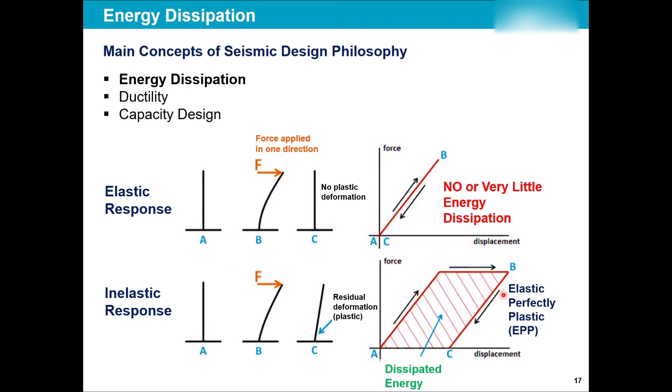Let's see the same case under an actual earthquake. So earthquake loading, acceleration versus time. My building is not getting pushed only in one direction, it's now getting pushed and pulled repeatedly. If it's an elastic behavior, it goes O to B and then back to O and then to the next point, like this. But when it's an inelastic behavior, it goes O to A and D and then G, and it makes a kind of cycle and a cycle and a cycle.

This cycle and cycle will dissipate energy. That dissipation of energy will prevent the structure from a sudden failure. Sudden failure here, sudden failure here - you see, fracture can happen, but this dancing prevents that fracture from happening. So the building will undergo permanent deformation, but it will save its residents. So I want energy dissipation, and that is given to me by inelastic response of my material. When I have elastic material like glass, suddenly there is no deformation, and a sudden collapse - that is something bad in earthquake engineering. I want something to start dancing with me, so remember this.

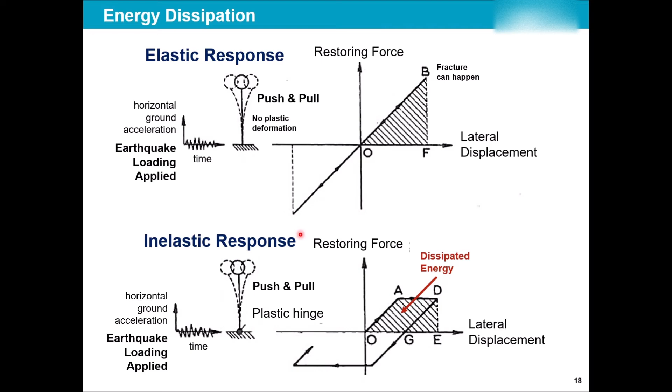Another concept after energy dissipation is ductility. Generally our materials are either very brittle or they are ductile with different degrees. A brittle material reaches a point and suddenly collapses. A high ductile reinforced concrete will reach a point of yield, and then it starts deforming and deforming and deforming. This deformation will be permanent, but it will prevent sudden collapse. Again, similar to energy dissipation, ductility will help prevent a sudden fracture, a sudden collapse, which is the worst situation in any earthquake failure.

So ductility is the ability of the structure to undergo large deformation. Strain is change of length over initial length. So the higher the strain, the larger the deformation or plastic deformation as it enters plasticity or inelasticity without failure, or the ability of a structural component to deform beyond its elastic limit. So the structure deforms before collapse without a substantial loss of strength. As you can see, the strength is still the same, while a brittle material like glass reaches that strength and then suddenly drops all the way to zero.

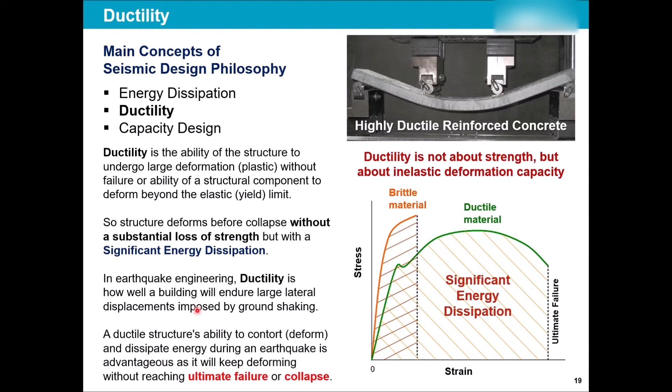In earthquake engineering, ductility is how well a building will endure large lateral displacement, meaning earthquake load imposed by the ground shaking. So ductility factor is an indicator of the ductility of the structure, and simply, in terms of deformation, it's the deformation at failure or ultimate - the last point of the curve of stress-strain or force-displacement - to the yield deformation. So imagine this is the yield deformation and this is the ultimate deformation, so the ratio of this over this.

Now consider this structure as a ductile beam or column, and consider this structure as a non-ductile beam or column. So a ductile behavior will be something similar to this - this is the same curve, force displacement. Then look at this: the ultimate point and the yield point are very close, so this ratio will be very small. But in the ductile case, this will be a bigger relationship and the ductility factor will be higher.

Now, if the curve is moment-rotation, it doesn't really matter - it's the rotation at failure to yield rotation. Or if it's based on curvature, it will be moment-curvature, so curvature at failure to yield curvature.

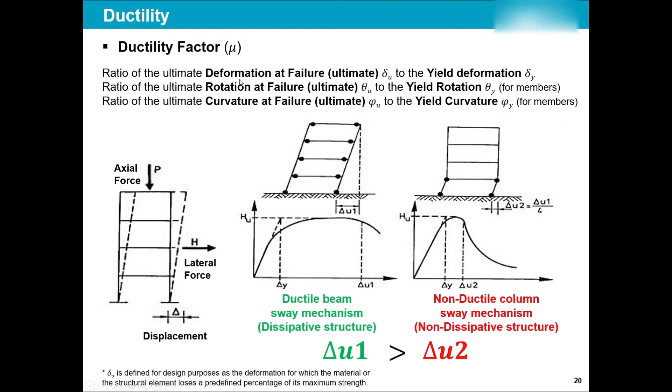That will be the ductility factor, or as we show it with mu. Now, we combine that dissipated energy and ductility behavior together, and we give ourselves a kind of discount. We say that if my building is capable of dissipating energy, and because of that has a very ductile behavior of structural components like beams and columns, I can reduce the level of my seismic action.

We will see this when we go into the seismic design based on Eurocode 8. Clearly you will see how much this discount and reduction of the level of seismic action works. But for now, remember that the behavior factor combines this dissipation of energy and ductile behavior.

There are two methods that we come up with the behavior factor, or Q. One is the equal displacement rule, which is mainly for flexible and tall structures. The other is the equal energy rule, which we usually use for low to mid period structures, or stiff and short structures. So the equal energy rule for the White House, and the equal displacement rule for Burj Khalifa, let's say.

Again, when I talk about Burj Khalifa, we know its period is 11 seconds, but you can consider it as a tall building with 4 seconds, something like that, as well as a short building, the White House, let's call it, with a period of 0.4 or 0.5 seconds. So the beginning of the response spectrum and all the way to the end of the response spectrum, flexible tall buildings and stiff, short buildings.

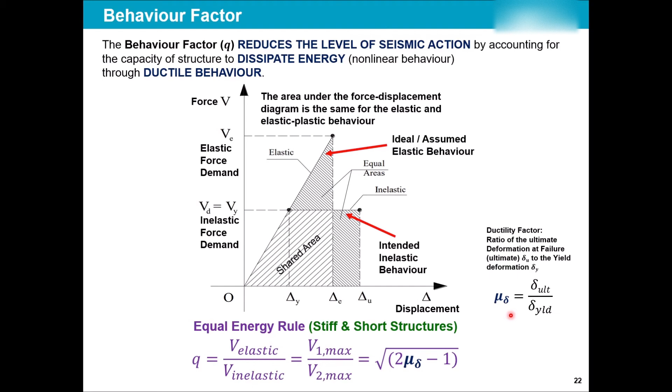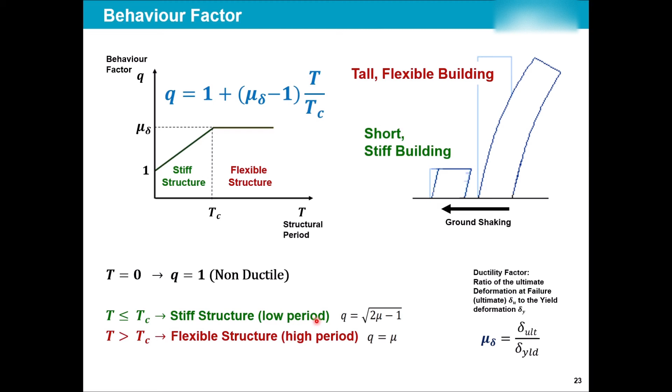Equal energy rule, as we just discussed, and the equal displacement rule, as we just discussed. And again, the ductility factor - remember how the behavior factor is related to the ductility factor. We have it for high period structures and we have it for low period structures, and it just follows this simple concept of having similar displacement or having equal energy.

Now, we discussed energy dissipation, we discussed ductility, and how these two are combined together to have a factor representing them, called the behavior factor. Now let's talk about capacity design.

Imagine a chain. If I pull it, at some point one of its links will start breaking. Do you all accept that the link where failure starts will be the weakest link? Yeah, for sure. Now, we can assume our building - all of its components, from slabs, columns, beams, joists, girders, connections between the columns themselves, between the beams and the columns, connection between the slab and the joint, footing, how the columns are connected to the footing, the foundation - all of these as different links of a chain.

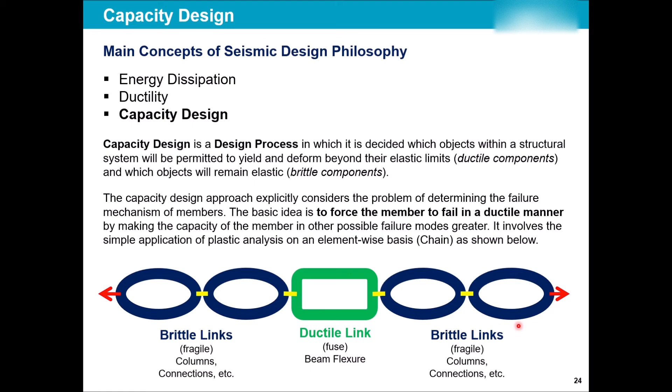Then I have moved my failure to the place I want it to happen, so it causes less damage to all the other components, and I've made sure the other components are stronger, so I can follow the normal, elastic, easy way of designing. I spend so much resource - time, money, and material - on the one weakest link I've decided on, making sure it's the best element possible. Then I make sure the other components are stronger, so they don't fail before my weakest link, and I can design them normally with any material, just making sure their capacity is higher. Now let's look at another scenario.

In a normal situation, imagine this is my weakest link. I'll make sure that this weakest link is so ductile that it takes a long time to fail. On the other side, I'm happy that all of the other links, like my columns, my connections, and everything else, are stronger than my weakest link. So whenever this guy is failing, the failure is shifted far because it's a very ductile material and it dissipates energy, so it's very low chance that it will fail.

I'll make sure that before this fails, none of the other components, which are more essential to my building's integrity, fail before this. If this concept follows, this will never ever happen.

Look at this building. You can clearly see that the beams and the slabs are strong. They stayed in their position and they look like pancakes on top of each other, while the columns were designed very weak. Now imagine the other way around.

If I have designed the columns very strong, but the beams weaker than my columns, in a way that those beams were strong enough and ductile enough to dissipate energy, I would give the residents of this building more time - the beams are starting to dance, the columns are still strong and nothing has happened to them.

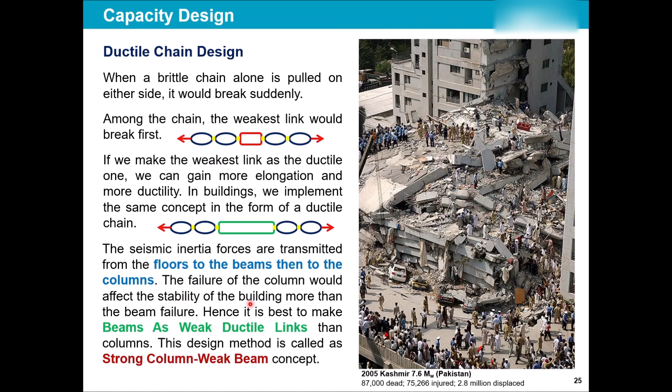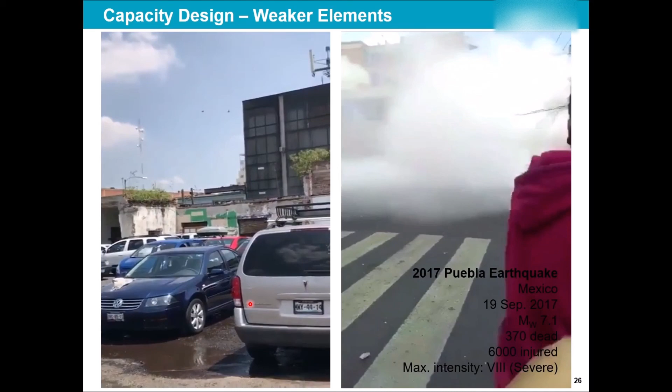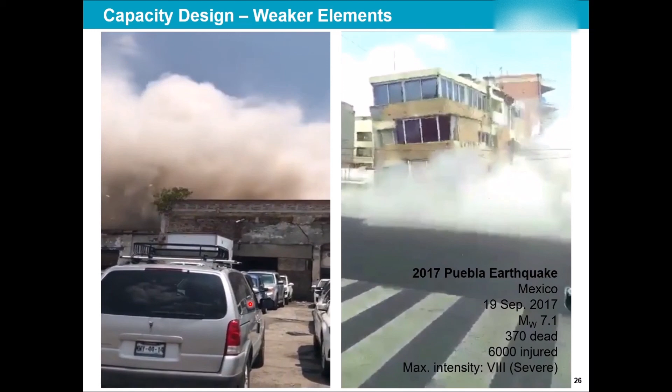Let's see some failures which not having a strong column weak beam, or having a weak column strong beam, has caused. This is the earthquake of 2017 Mexico, again a very strong earthquake, 7.1 moment magnitude. Unfortunately, 370 people lost their lives and 6,000 people were injured. If we look at the Mercalli intensity, it was about 8, so it was a severe earthquake.

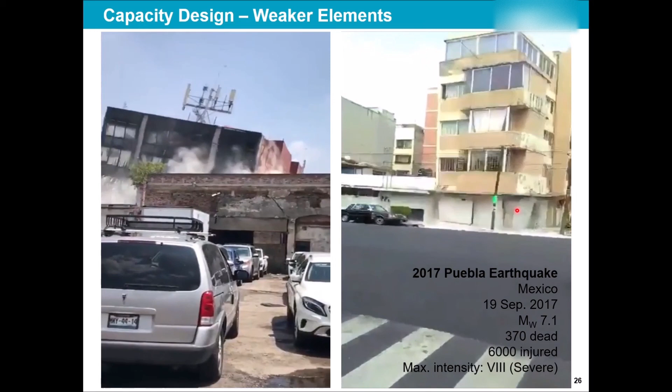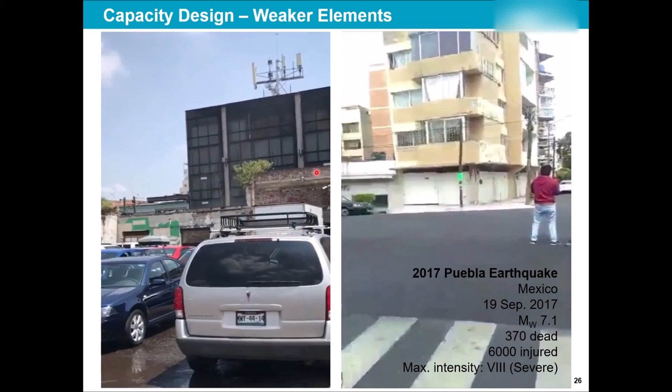Just concentrating on this building on the right side, you can see definitely the failure starts here. So the bottom columns fail, the entire building gives up. Same thing happens on the left as well - the building seems okay, suddenly something happens on the right side, and trust me, it's again a weak column at the bottom which causes the entire building to collapse together like a pancake failure.

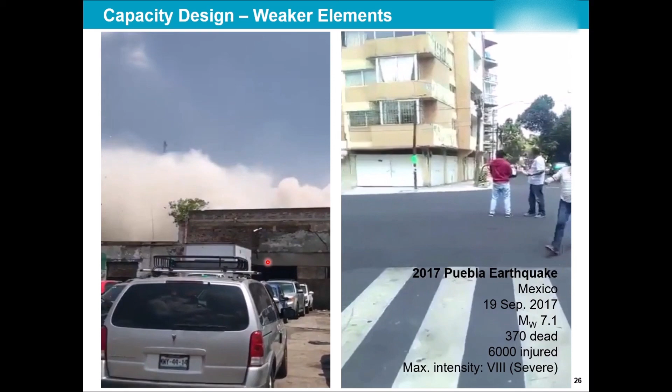Now, if only one of the beams on the third floor failed, this wouldn't have happened. Only that floor, that bit of the slab, would have failed. But the integrity of the building would have been kept and residents could have run out.